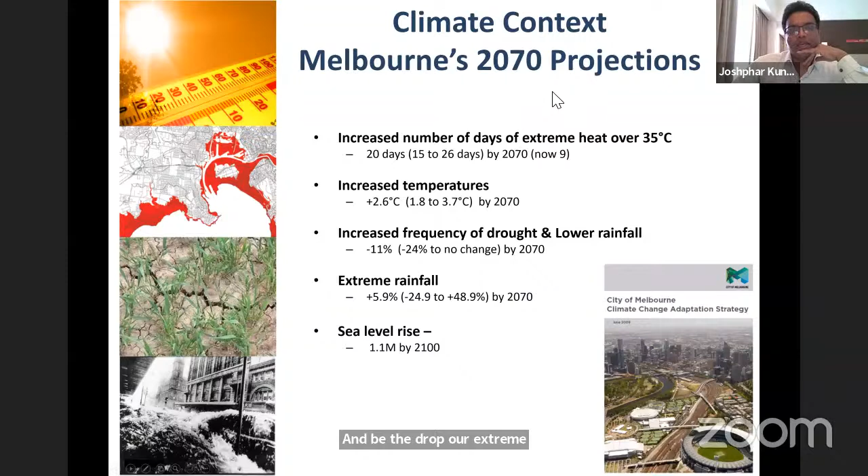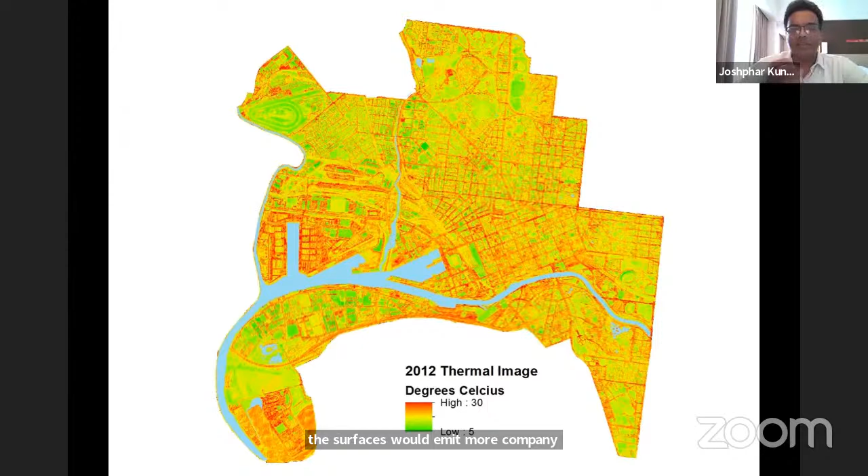So this is to give a look at how each surface behaves. There are some special surfaces which actually emit higher temperature than others. So this study is to understand what sort of surfaces, even the color of the surfaces, even the material of the surfaces, would emit more temperature or even radiate more temperature. So this is the thermal image of the city, the study area.

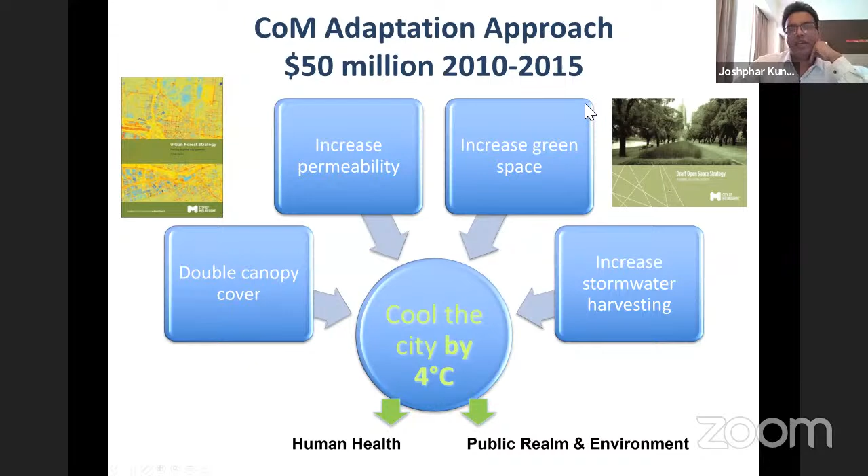So that's the adaptation approach. Now coming to where to do, what to do, obviously there could be an opportunistic approach. The other one is strategic approach. Sometimes being an engineer, you may be looking locally at everything, and if there's an opportunity, you may focus on that area and do it. But if you are a visionary and wanted to look at things broadly, you will come from a catchment-wide view, a bird's eye view, and look for the strategic approach, which would actually deal with the problem much better than dealing very locally.

So that's where the spatial component comes into picture, where GIS or any other database will normally answer how much, what, that sort of questions. But GIS has that intelligence of location, which answers the question of where to do, where I should be targeting.

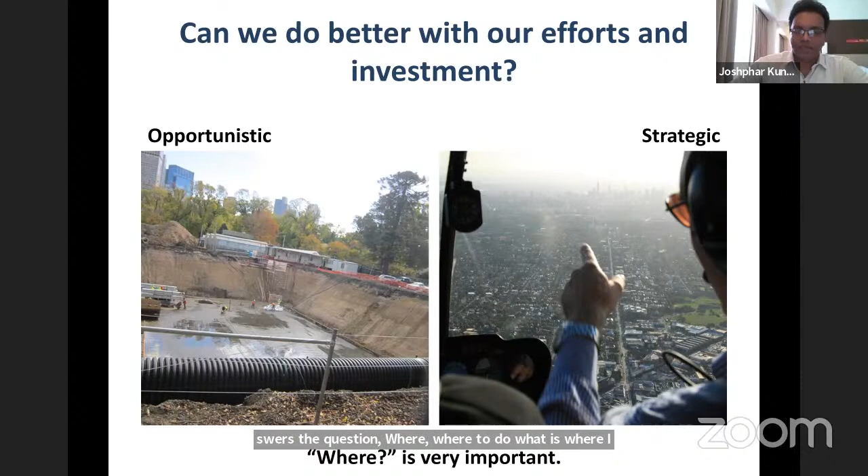So the ICAM, Integrated Climate Adaptation Model, the objective is to inform strategic decisions relating to drought, soil moisture, tree health, flood risk, and sea level risk. It should also help us identify the most vulnerable areas, and help us compare various adaptation strategies, whether to put in green infrastructure or gray infrastructure.

Again, obviously gray infrastructure is not what we want to favor. It's not easy to remove the pipe and put in a big pipe. And for environmental reasons too, we should promote more green infrastructure. That doesn't mean that can happen every time, so we even compare various strategies.

And also the objective is to facilitate communication. So we wanted to finally put all those layers on the web, and people should be able to switch them on and off, and even switch on combinations of variables to see the outputs. So the web part is only the visualization part. So the communication part, when I say that, is actually the visualization part.

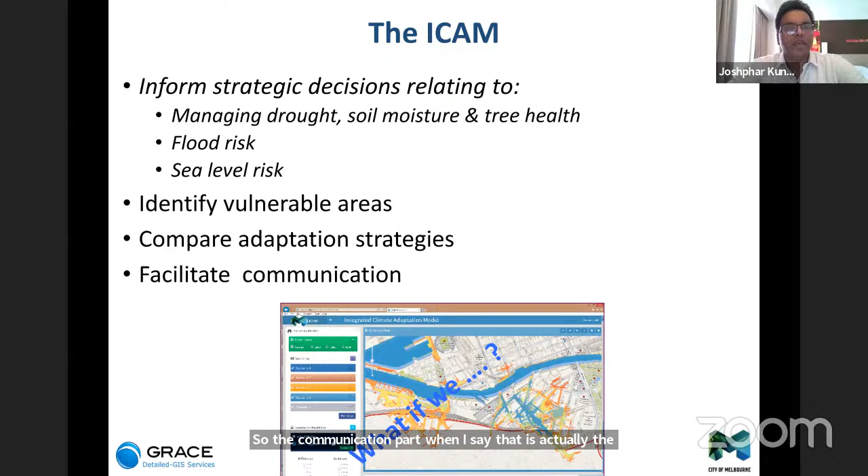Now, what the approach involves also, we wanted to do it pretty detailed, meaning spatially explicit. It's not a lumped approach, it's a distributed flow modeling approach, and also multi-layered, multi-criteria analysis. And we have, fortunately, LiDAR data acquisition happening now and then very frequently. Some of you may know LiDAR is light detection and ranging. It provides us a very high resolution digital elevation model, and even non-ground information like trees and roofs.

And it's very detailed elevation information. When I say detailed, we're talking about a digital elevation model which is 1 meter by 1 meter. So without doing any surveys, just by having this LiDAR data, you have control on ground. And now we're talking about plus or minus 10 centimeter accuracy, both vertical and horizontal. With such a dataset, it's very handy to know the slope. Most of you would have played with elevation models. Once you have elevation, you can derive slope, aspect (direction of the slope), flow directions, and many other variables.

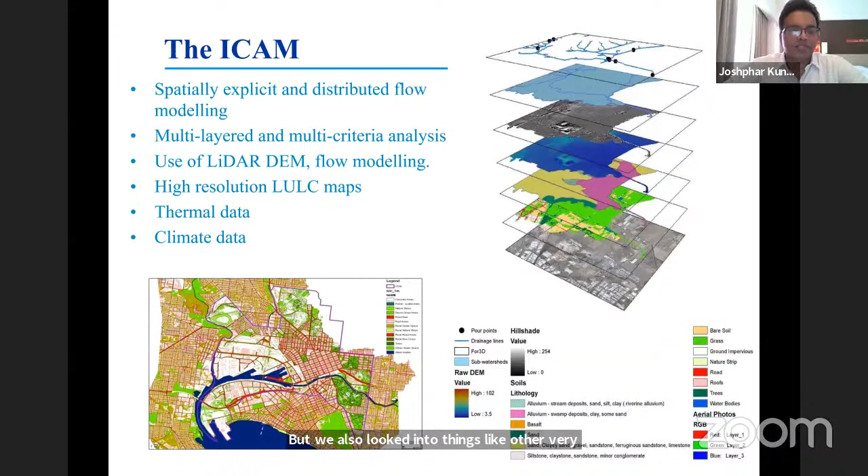So the other layers, as I showed you, thermal data, and also we use climate data to model various AEPs for flood modeling. So we've gone pretty detailed, but we also looked into other variables as well. For example, as I said, 1 meter cell size is our minimum cell size for the elevation model, and we've gone by catchment-wise understanding of local problems.

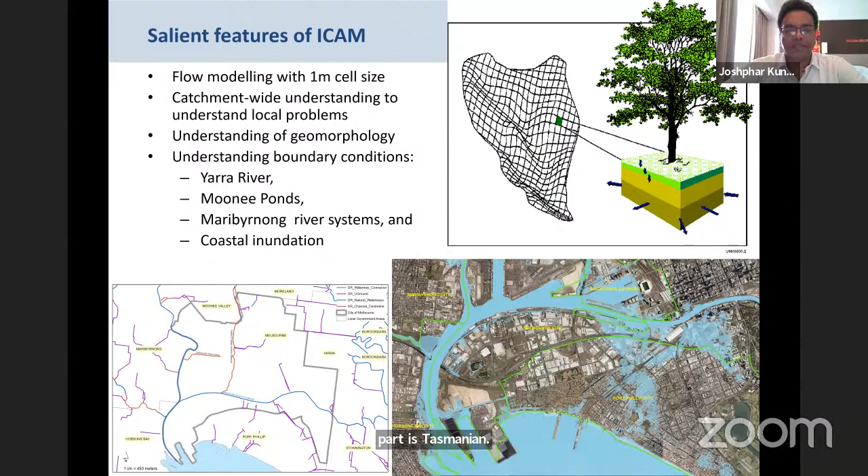This is very important because where your study area is situated within the entire catchment makes a lot of difference. In the next slide, I'll show you where City of Melbourne is with respect to its river, the Yarra. Here you can see we also have, in between Melbourne and the sea, and the bottom part is Tasmania—so it's a coastal city. Now this is the catchment for the City of Melbourne. Melbourne is at the mouth of the catchment, and you see how big the catchment is with respect to the study area. Being at the mouth means any upstream activity, any upstream variables, or even rainfall is going to affect that study area, because that's crucial.

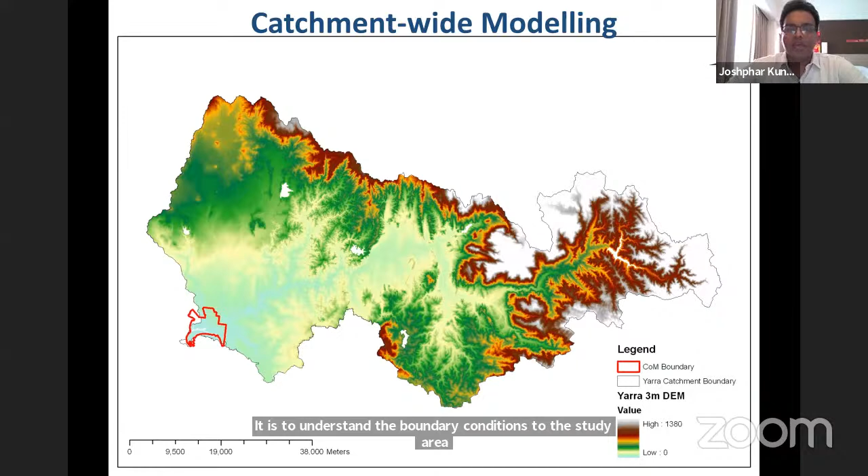It is important to understand the boundary conditions to the study area, and also to understand the geomorphology. The City of Melbourne has some paleo channels as well. If you see on the right side, you can't see anything now because every tall building is there—visually you won't be able to see any issues. But if you look at the geomorphology of this area, it has a lot of areas which actually connect unexpectedly to other areas.

Even the river, if it overflows enough, can overflow all the way to the edge of the ocean. Touch wood, it may not happen, but I'm talking about a 2 meter increase from river rise and sea level rise together, which can wipe away the whole paleo channel system. It can actually take a completely different route. None of the drainage infrastructure would be able to help—rather, they would all be closed, dysfunctional, if that happens.

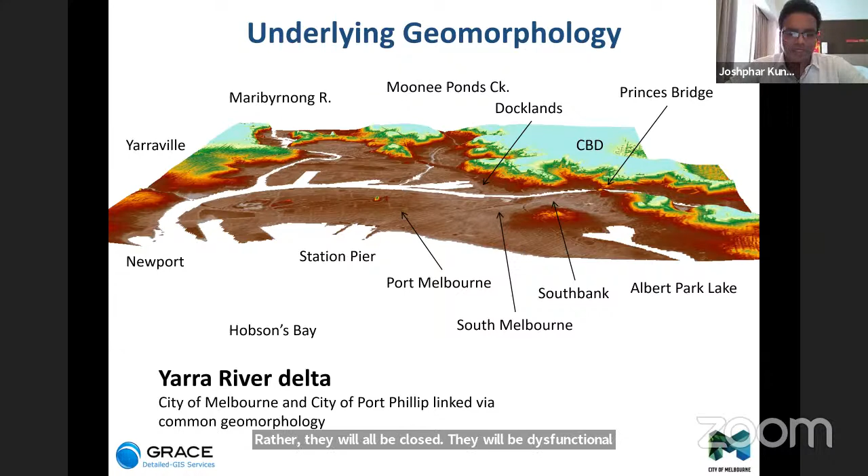So the other important thing: these are all the hydrographic sites, where we have continuous monitoring stations, so continuous discharge locations. We know how much water is coming in. So for any given study area, it is important to know the boundary conditions, because we won't be able to model everything for the entire catchment. But if we are modeling only your area, you should also look at all the inputs into your area. So this is to show you how we have taken care of the boundary conditions using the discharge locations.

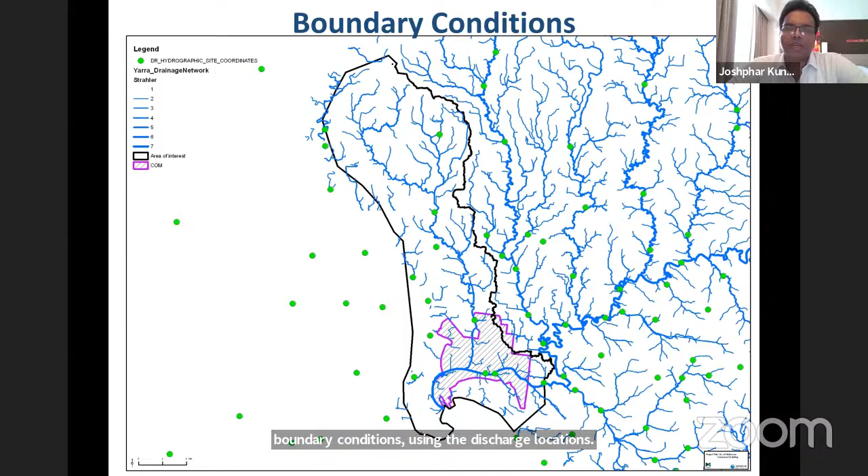Out of that output, which we call the engineered digital elevation model, you can generate flow lines which represent the true engineered pipe network, but with a meaning. So in here, we have applied Strahler stream order. That is showing how the branches are feeding into each other. The thicker the lines, that's where the water is being accumulated. So in a snapshot, you know where the water is going, which means you can also do some intervention modeling.

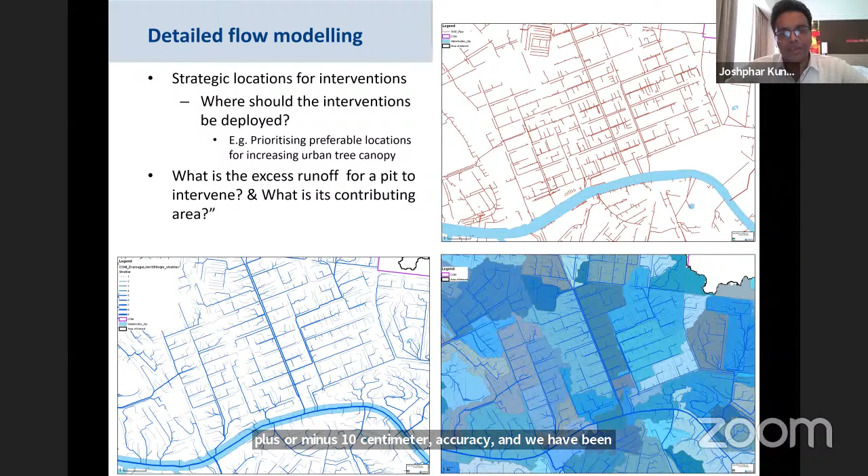So very handy, and this doesn't cost you an arm and a leg, because we're talking about LiDAR. The technology is there. It's very proven technology, with plus or minus 10 centimeter accuracy. And we have benefited greatly from this LiDAR technology. So then we may talk about what sort of infrastructure should go in. When we say, okay, there is a downstream problem area, we need to do something upstream, or we need to do some tidying up of the upstream catchments.

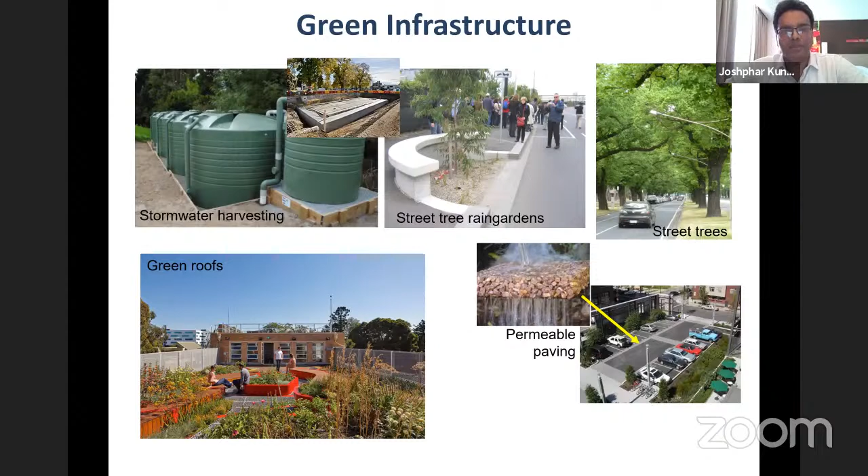We may have to bring in green infrastructure as much as possible. It can even be, you can see, green roofs, permeable paving, street trees, rain gardens, or stormwater harvesting, or many other green infrastructure options. The next one, when you cannot do anything, you have to put in some pipes. Obviously, gray infrastructure will come in. Where there is a possibility to upgrade the pipe network, you can upgrade that as well. So that's the main objective.

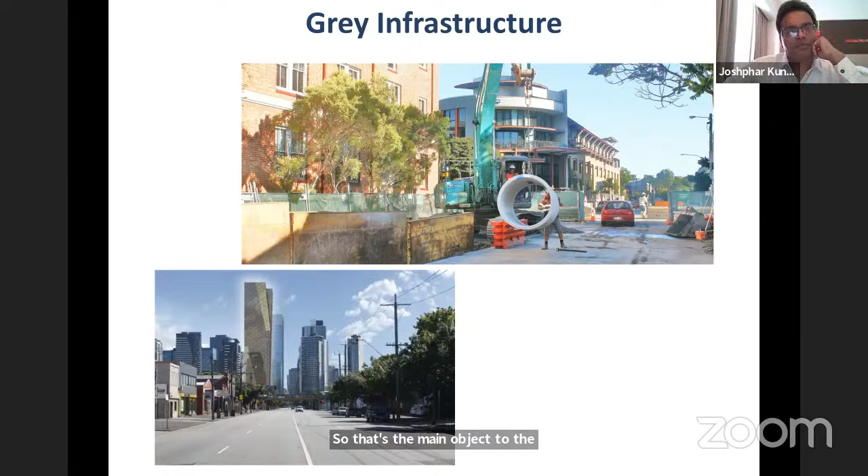Then we have come up with a framework, which means what are all the variables we should look at so that we can identify vulnerable areas. We can then compare some adaptation strategies. Should it be green infrastructure? Should it be gray infrastructure? Should we have water tanks, or should we have a bioretention system? So we should have some options, a cost-effective way of comparing options, and a web interface to facilitate that sort of exercise. This may not give you a 100% straight answer, but at least it will guide you, and then from there move on to the ground, to assess it properly and to take decisions.

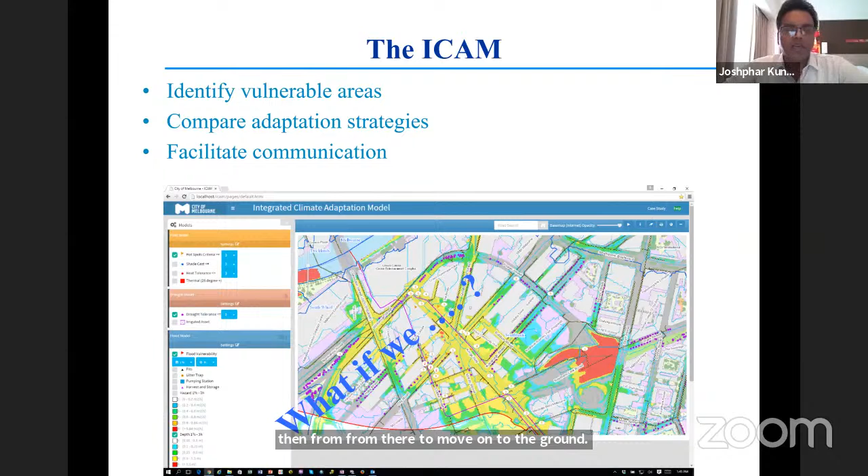So towards that, this interface is actually to serve a few models we call the heat model, drought model, flood model, river rise model, sea level rise model, and then looking at them in an integrated way.

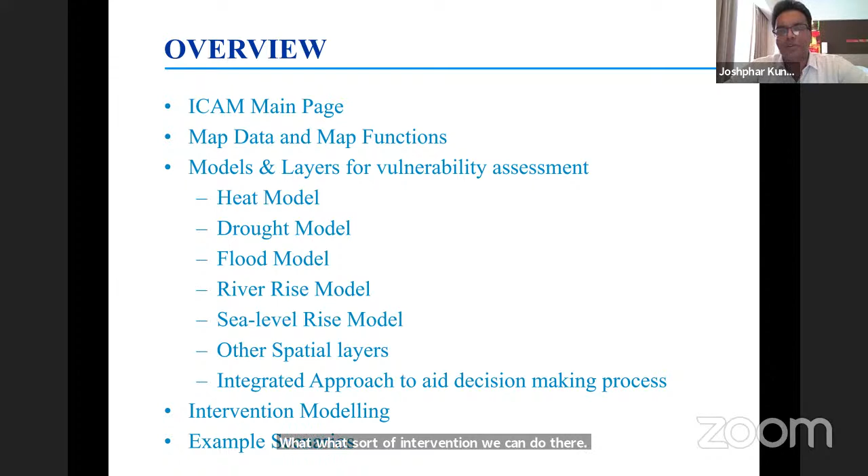And then, once we know the vulnerable areas, we look at intervention modeling. Okay, what are the options available? What sort of intervention can we do there? I will take you through maybe one example of how it works, but just to quickly give you the interface and what these models are.

The heat model is basically, as I showed you in the beginning, the thermal temperature acquisition, and we have categorized areas. We took 26 degrees from some literature, I think, as the threshold to see all the areas greater than 26 degrees. So that will show the pockets where the temperature has been more than 26 degrees, where the surface is reflecting that much.

And we also have tree data. It has information like the amount of shadow they cast, and also the heat tolerance from 1 to 5. We have that sort of information for each tree within the City of Melbourne. Then we even have hotspot criteria. We have developed criteria to show the hotspot areas we want to see.

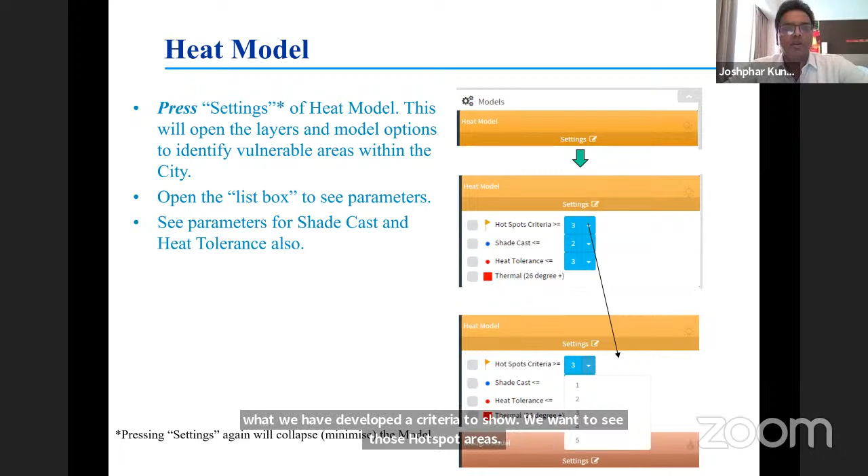So what you're looking at here, the insert is actually a zoomed-in version. You can see the red bits are those which are greater than 26. Those areas, most likely roads, or could be some other surfaces, are emanating more than 26 degrees temperature. So that is showing those pockets.

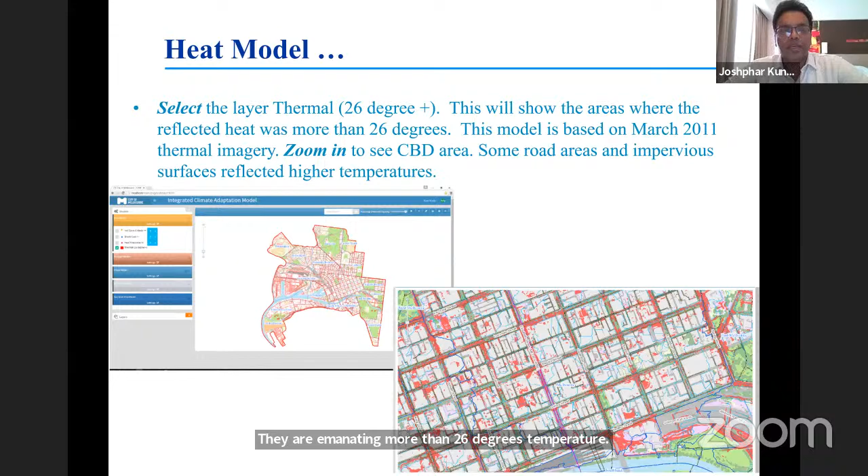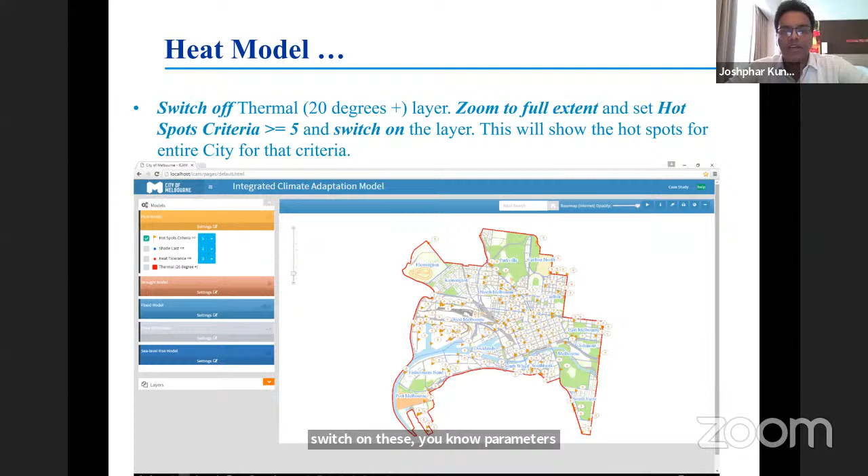Then this particular one is showing hotspot areas greater than or equal to 5 with some criteria: trees casting shadow less than 2, heat tolerance less than 3, something like that. You can switch on these parameters to visualize where they are. And this is showing the good trees, the ones with shadow cast less than 1.

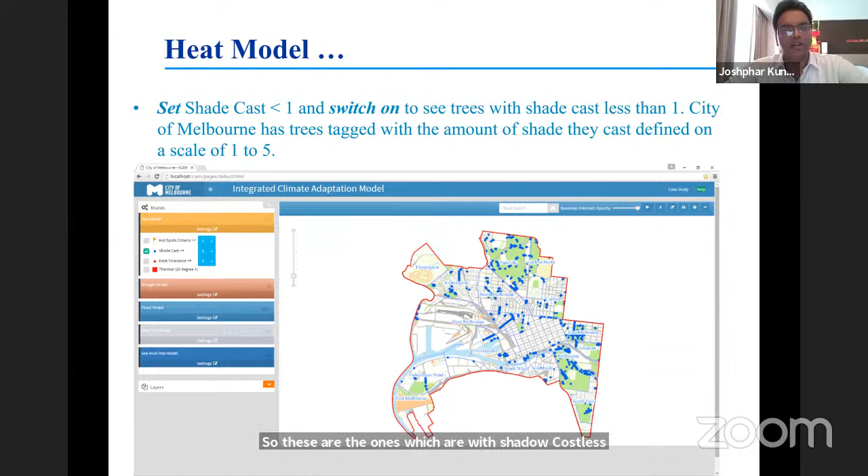So the interface even gives you the tree locations where the heat tolerance is less, which means we have to be careful what sort of surfaces are around and what we can do. Do we need to change the species, or do we need to change the surface, make it more permeable, more green space, more suitable so that the trees won't be affected? So that's the heat model. You can even see a zoomed-in version of it.

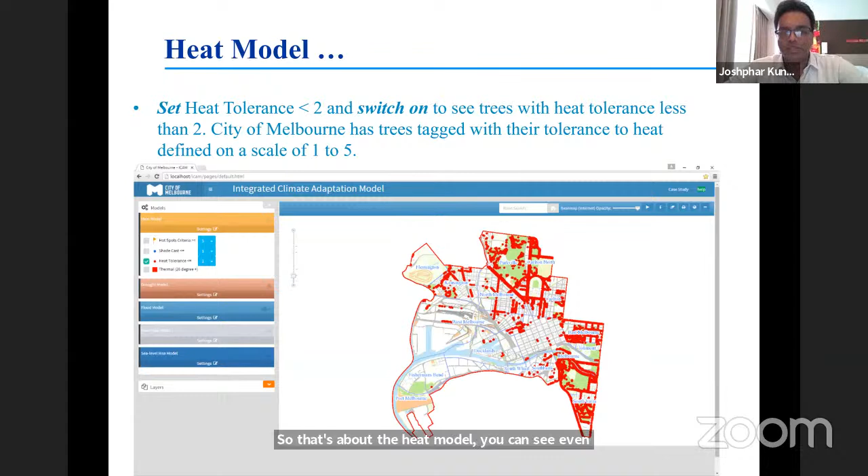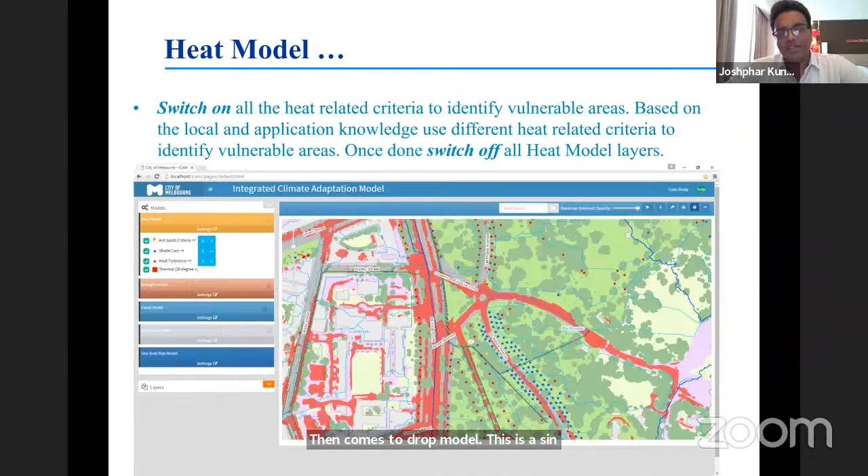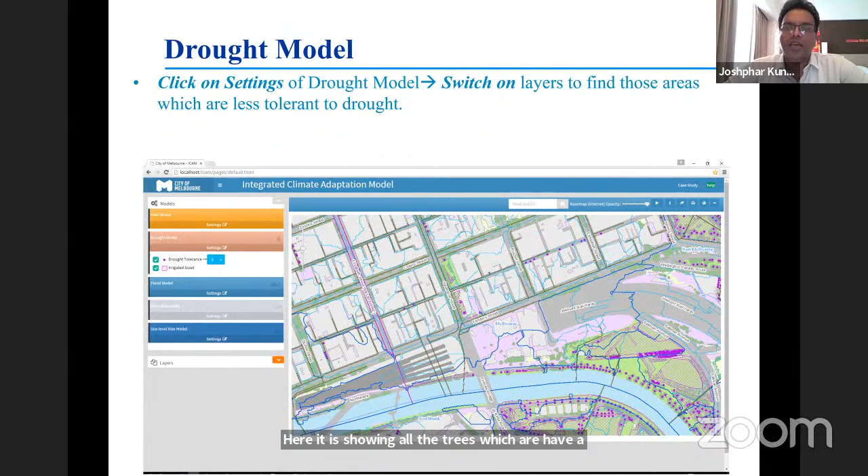The interface is to show the outputs, but the outputs have to be developed individually and served on the web server. Then comes the drought model. This is a simplistic model. It will show all the irrigated assets as a GIS layer, and it will also show you the trees, which have drought tolerance scaled from 1 to 5. Here it is showing all the trees which have a drought tolerance less than 3, which means less tolerant. Then we know this is the area we should be careful about.

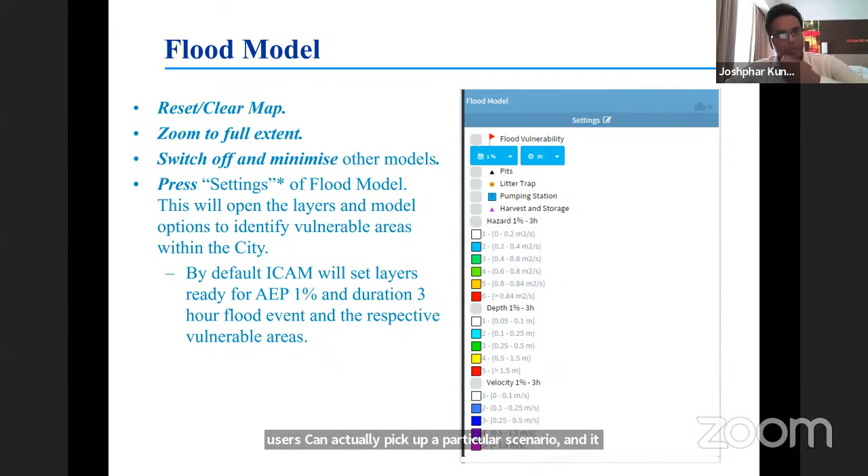Then coming to the flood model, we have generated various AEPs, and for each AEP we have a hazard raster, depth raster, and velocity raster. Users can select what AEP and what duration, whether 3-hour or whatever duration they want to look at. We have developed a series of flood models and placed them on the web server. Users can pick a particular scenario and it will bring up the respective grids and show them there.

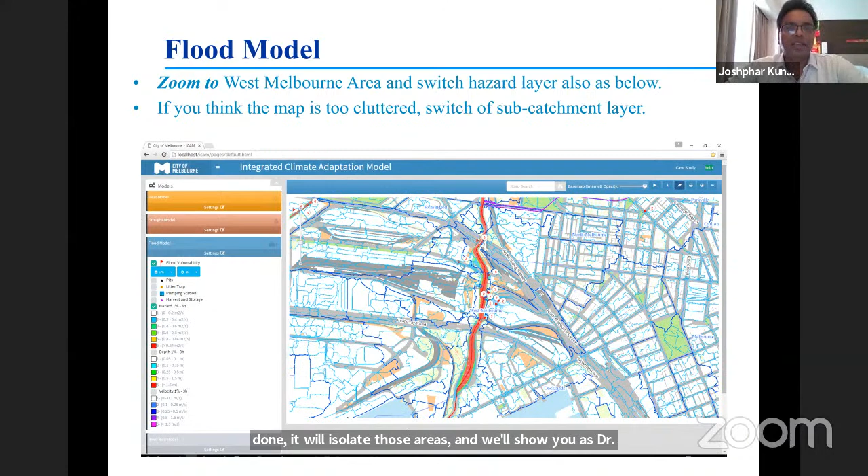So that's the interface. For example, what you're looking at here is the red bit in the middle. That's where the flood velocity is greater for a 100-year event, which is 1% AEP. These are the areas it will highlight as vulnerable. You can keep adding other model variables as well, and it will isolate those areas and show you the vulnerable areas. This is also showing a similar thing with other infrastructure information. So that's the flood model.

Then we also have the Yarra River posing problems. As I said, it's a big river coming from a big catchment. It may not rain at all in the City of Melbourne, but there may be huge rain somewhere upstream that can raise our river. So we have river modeling done at 10-centimeter intervals from 1 meter up to 3 meters. Users can define a 20-centimeter or 30-centimeter increase, and accordingly it will show the inundated areas. This is only the river rise.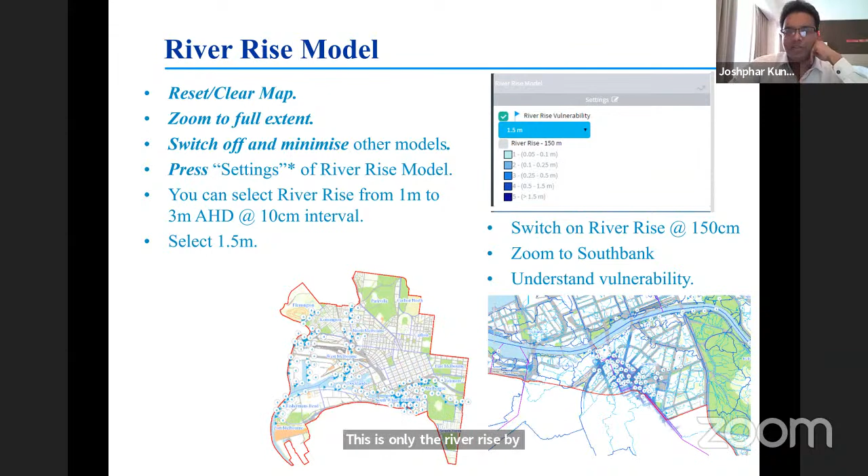But along with this, let's say you have sea level rise, because it's a coastal city as well. I don't know whether you can see my mouse. This is that paleo channel I was talking about, and this is our river. In this area we are currently looking at 2 meter sea level rise. At 2.5, this whole entire area will be joined together. None of the drainage infrastructure will be working because everything is choked up and blocked, and the whole area will be inundated.

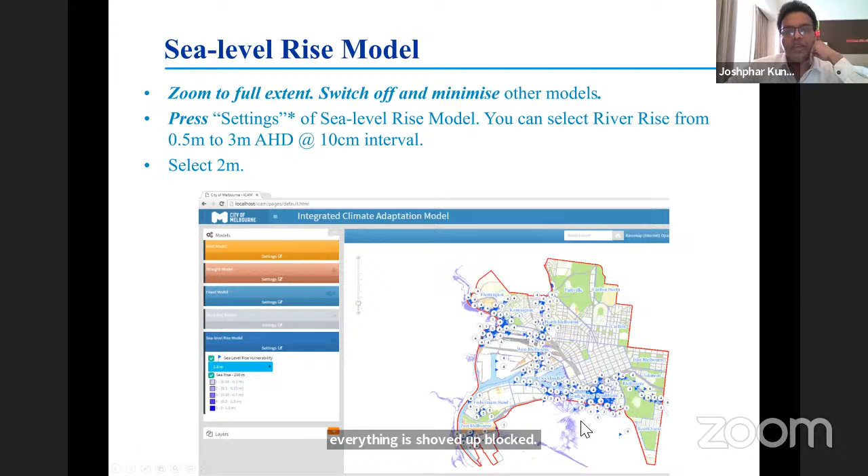So once we have all these models served on the web as an integrated approach, you may ask questions like, okay, I want to see vulnerable areas because of sea level rise, because of river rise, because of drought tolerance, because of heat model. You can actually select multiple criteria, and it will be able to show you the location or the area where you should do something about it. So that's the main objective.

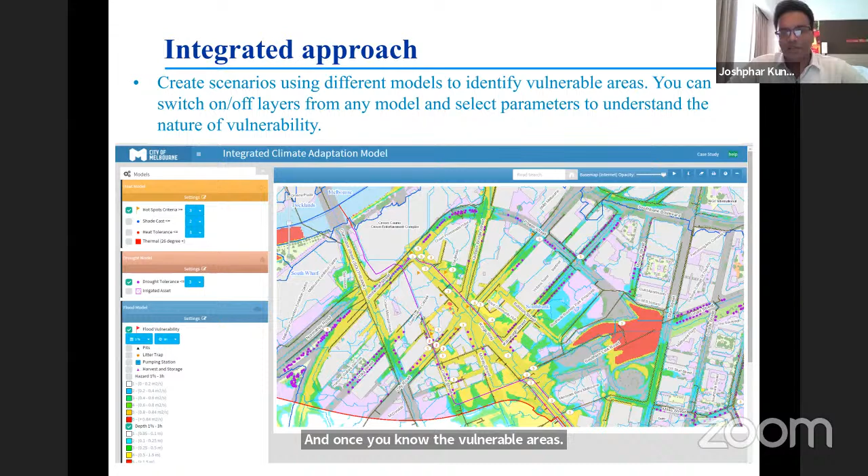So the first objective is to display what I want to display. Obviously, this interface is not generating anything. It is actually displaying pre-generated models in a convenient way to look for those vulnerable areas. And once you know the vulnerable areas, because we have such a detailed digital elevation model, we have subcatchments and everything working behind, you can select, let's say, intervention model.

I'll show you now. The entire area is segmented into subcatchments and major catchments for each pit, which means minute detailed catchments are there. You can say the entire area is segmented based on the flows. And the user can select any one area where they want to do something. It will give them the entire catchment. It will also give them the subcatchments in it.

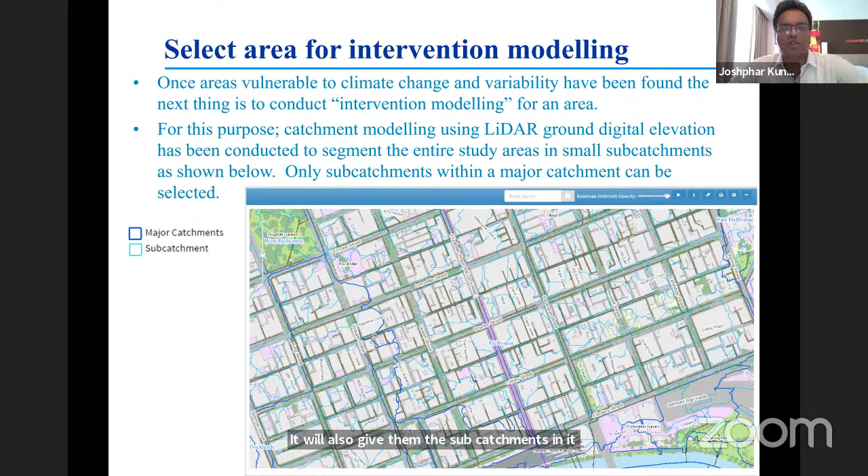Let's say you want to do something in here. So you may choose that pit and it will immediately show you the respective catchment for that one. Here you can see the red boundary is the catchment, and the internal subcatchment is also shown, as well as how much pervious information; all those things it will display.

So for example, here it is showing it's a subcatchment and it has this much of pervious area, this much of roof area, this much of other impervious, which is ground impervious area. This has this much of tree area. Then using that subcatchment, you can now go to intervention modeling. It can be related to tree health. It can be related to potable water, and there are many other things.

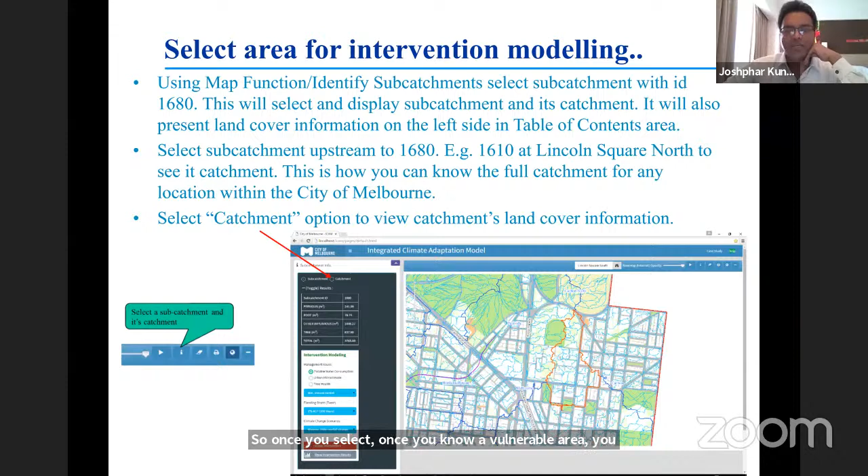So let's now quickly move on; maybe I'll go through a scenario, but this is just to show you the interface of intervention modeling. Once you know a vulnerable area, you want to do something there, and you select that area, it will give you existing information of what it has in terms of roofs, trees, pervious areas, impervious areas, and then you can feed in that information. And we have developed this in R Studio.

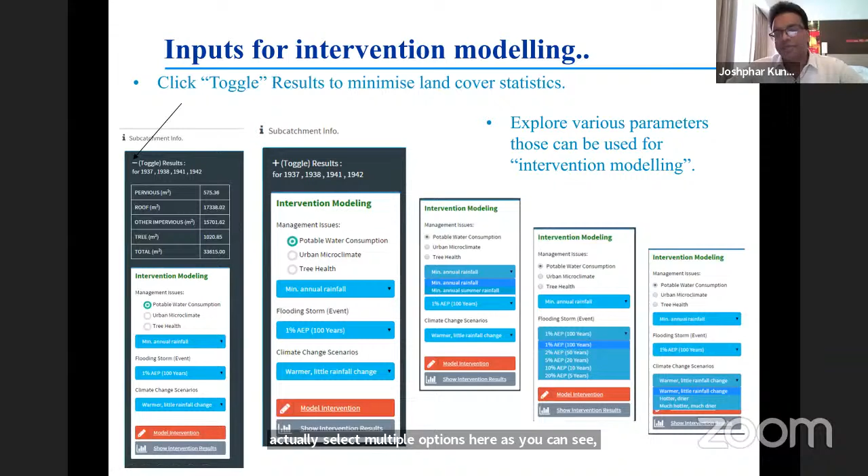And so you can say, I want a flood storm event, or even a climate change scenario. How about if it is warmer, little rainfall change? Or you can select multiple options here, as you can see. You can choose various options, and I will show you a scenario here.

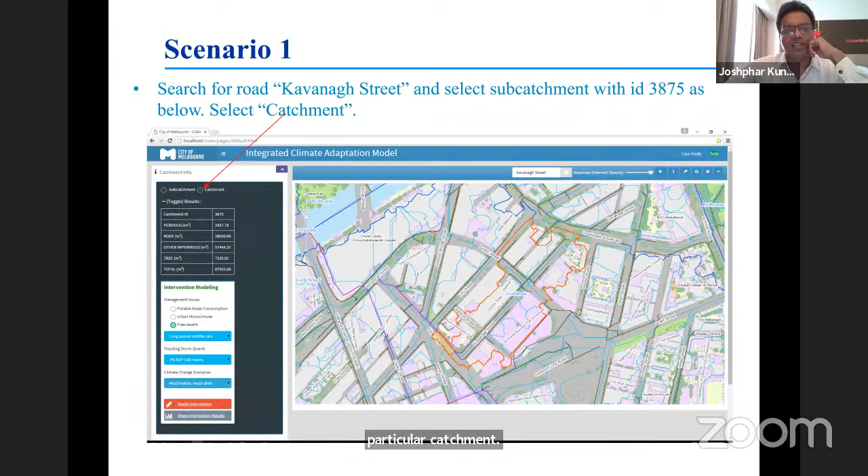So the user wanted to do a tree health scenario and selects a particular catchment. The selection here is tree health, long period, no or little rain, and 1% AEP for flood storm event. Future climate scenario is much hotter and much drier, and then they press the model intervention. That will launch this interface, which is intervention modeling.

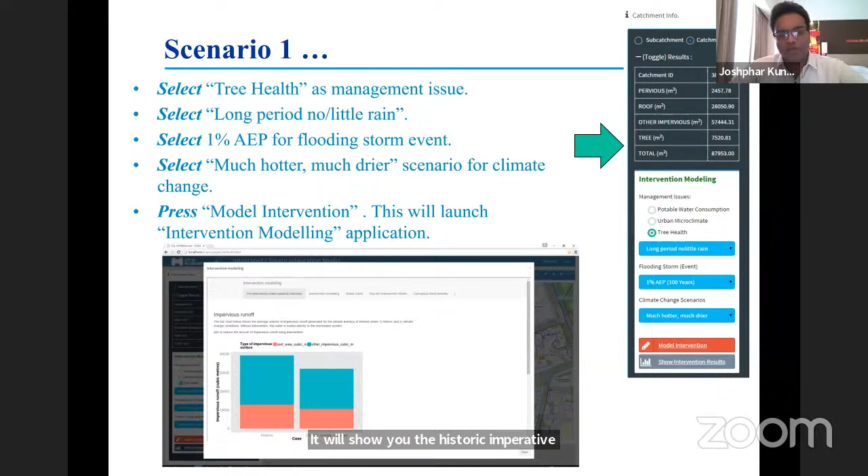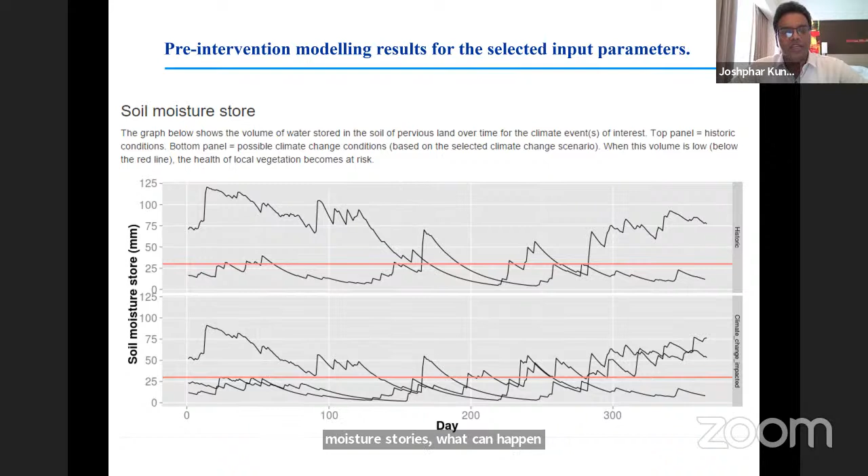It will show you the historic impervious runoff and what it would be with the climate change impacted one. This is about impervious runoff. Then it will show you the soil moisture storage, what can happen for that particular subcatchment. Then it will also give an interface where you can model something.

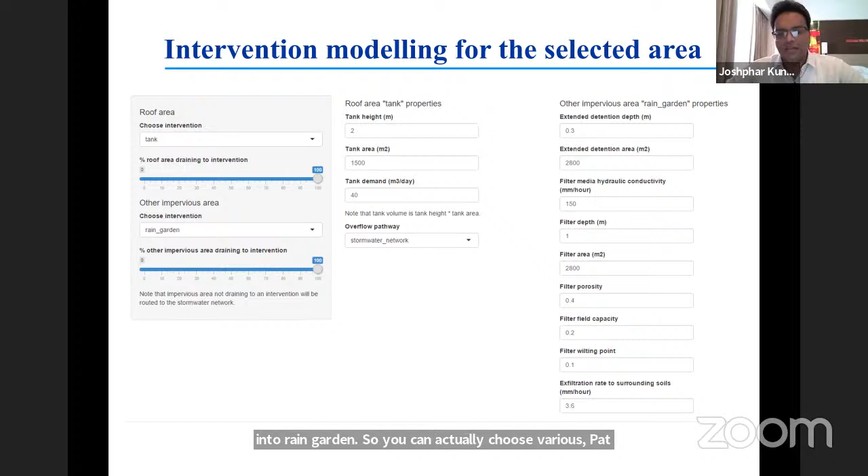If you want to put water tanks, you can choose an intervention like tanks. What is the roof area draining into the intervention? What will you do with other impervious area, will you turn that into a rain garden? So you can choose various parameters here, and then you run the intervention model.

It will display the intervention model with the parameters like this, with a report showing before intervention and after intervention, and what climate scenario has been selected. So yeah, for some of you it may be too much, but I'm giving a brief idea about what this tool does.